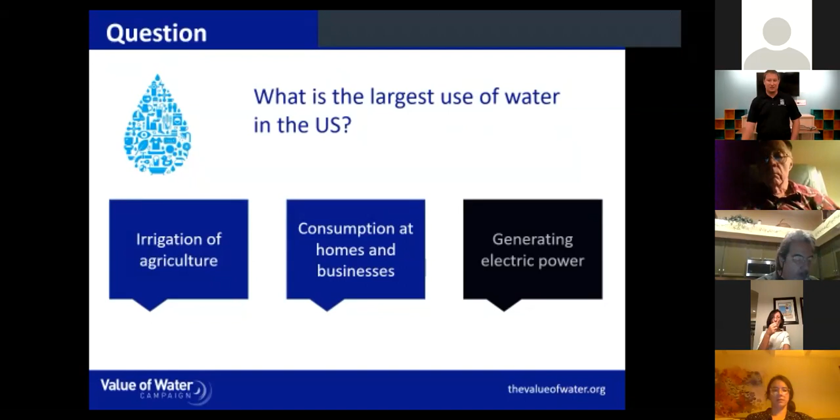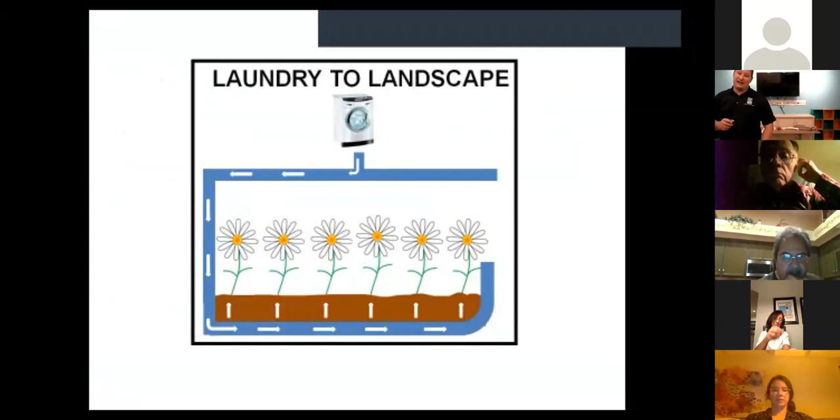All right, so now we're going to actually move on to the workshop and learning about what a laundry to landscape is. So first slide is, how do we use water? Well, for indoor use, 35% is in the shower and bath, 30% toilet flushing, 20% laundry, 10% kitchen and drinking, and 5% cleaning.

So your largest indoor use is going to be your shower and your bath, which is an important topic if you are going to install a more high-tech greywater system for your bathroom. I will cover that a little bit farther on in the presentation, but showers and baths are very high water users. Toilet flushing is really close.

It used to be the #1 until some of the plumbing codes changed, and then the water consumption started dropping in homes. Before '92, it used to be a 3.5 gallon toilet. After '92, plumbing codes changed, and it went down to 1.6.

Nowadays, 1.28 is considered high efficiency, and you can actually get toilets like I have at my own house, like a Niagara Stealth Assist, which is a 0.8 gallon per flush toilet. So it's not even a full gallon of water. Great toilets, I haven't had any problem with them. So those are your two biggest water consumers in your house.

But today we're actually looking at the laundry to landscape, which is still a very big user in your home, at 20%. So that's why we're focusing on the laundry to landscape. It's your easiest way to make a greywater system without requiring permits or getting a really expensive greywater system in your home.

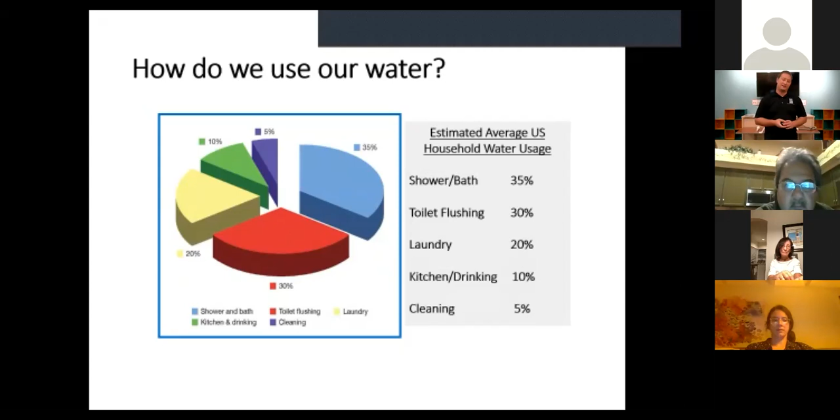Unfortunately, doing bathtubs, showers and bathroom sinks usually costs between $10,000 and $20,000 for the system to be put in, with permits required and all that type of stuff. So it is something good to consider since it is 35% of your household use.

However, with those things in mind, doing a laundry to landscape, where you don't require permits, is much, much cheaper, and you can do it yourself. It's a much easier and cost effective way to do it. And you also get a 20% drop in your indoor water consumption. So that's one excellent way to go.

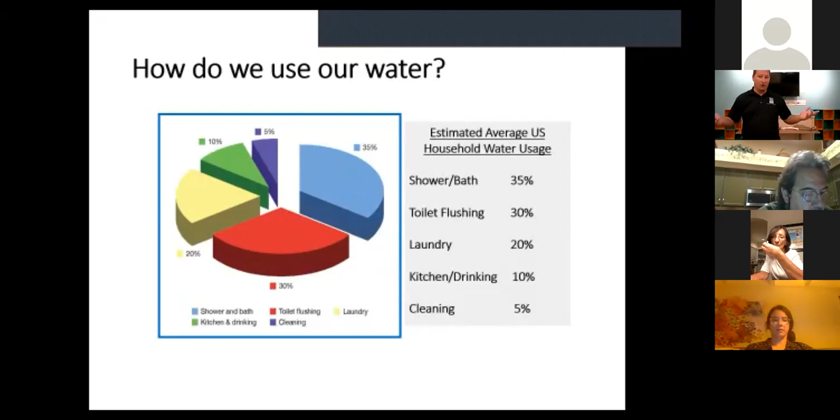All right, next slide. So why greywater? Well, our municipal water has a carbon footprint. So what's a carbon footprint? Well, it's the consumption of electricity, things of that nature. 19% of electricity used in California is related to water.

Reusing water that you've already paid for reduces the embodied energy per use. So you're getting 2 uses out of the water that you've already paid for, which reduces the carbon footprint and helps you with your bill and also with conserving water. So those are a couple main reasons why greywater is a good way to go.

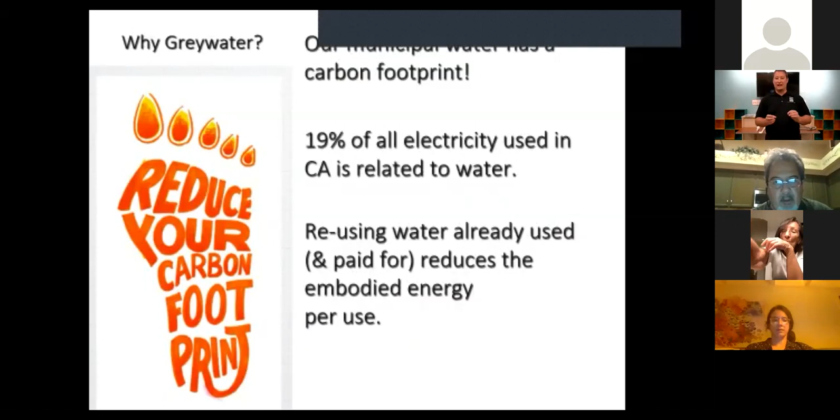All right, what is greywater? A lot of people don't quite understand what greywater is. Sometimes they think it's black water, which is sewage. Technically, you can get into that realm when you start dealing with dishwater and kitchen sink water. It's not considered greywater because you have all sorts of food particles and germs in that water. So sink water from your kitchen is not considered greywater.

However, shower and bathtub water is greywater, washing machine water, which is what we're talking about tonight, and also bathroom sinks. Those are the areas where greywater is made in your home: showers, baths, washing machines, bathroom sinks. Everything else is going to be considered black water or septic water. All right.

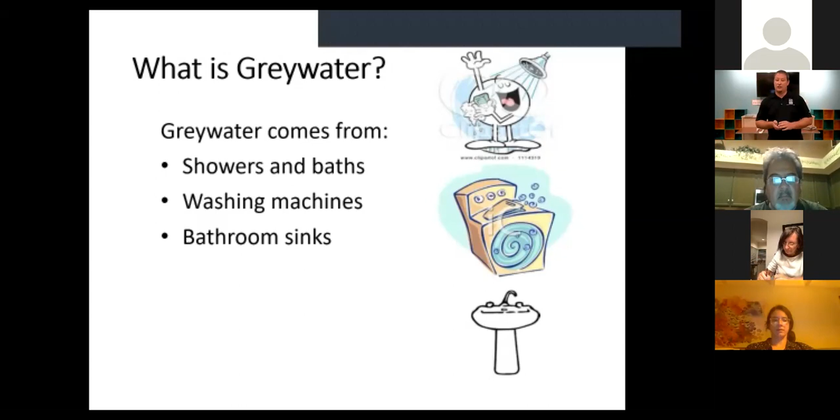What greywater is not, well, I already went over that a little bit. Toilets, which are septic, are not considered greywater. Kitchen sinks, also not considered greywater. Dishwashers, also not considered greywater. Washing certain items in your washing machine can make it not greywater. However, that has to do with the clothing that you are washing.

So when you are doing dirty diapers or oily clothes or clothes with chemicals on them, there is a three-way valve on your greywater system, which allows you to divert that water into your sewer instead of out to your yard to contaminate it. So if you did have some dirty washing loads, you just divert it instead of sending it out to your yard.

So technically you can consider that not gray water, but as long as you're using laundry that doesn't contain those items, it is gray water. So,

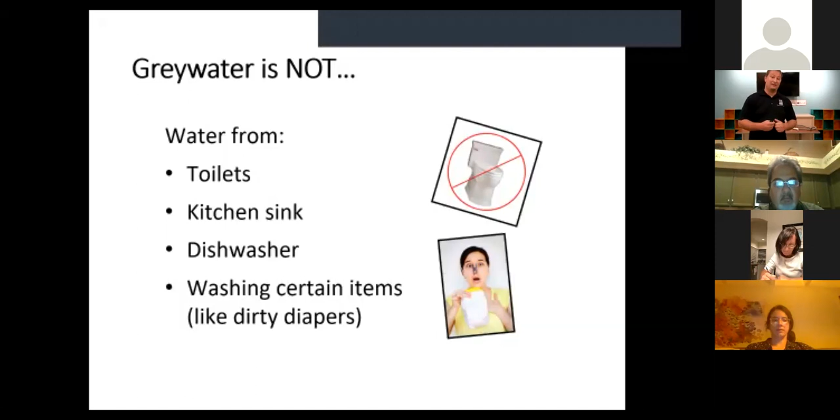all right, caution: gray water can contain pathogens. Definitely don't want to get pathogens, washing clothes with blood, etc. So those types of things you might want to divert out to the sewer instead of sending those types of pathogens out to your yard. Gray water may have chemicals in it, so like I said, oil-soaked clothing, etc. You would want to divert that type of material out to the sewer.

And then when you actually do get it out to your yard, you don't want it to pond. So gray water can actually turn septic relatively fast, within 24 hours, which is why you can't store gray water unless you build one of the really high-tech, expensive gray water systems like I was talking about, the $10,000 to $20,000 systems.

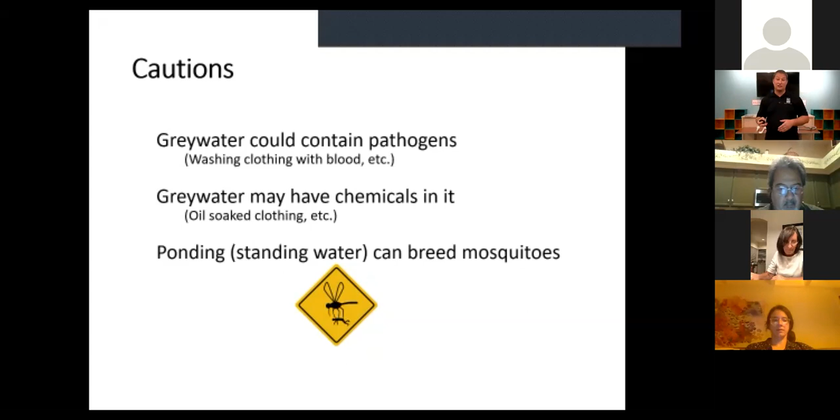I have a little mock display of one so you can kind of get an idea of what would go into that. But that's just to show you how much actually goes with a household gray water system compared to your laundry landscape, which is really not a whole lot of material needed to get going. So the storing it, all that type of stuff, you don't need to do and don't want to do unless you have a filtration system, because it does go septic.

Okay, so some of the benefits of using gray water: saving potable water. Can't really go wrong with saving potable water. Potable water is any water basically coming out of your house. Any drinking water is considered potable water. Any water coming out of your hose, any water you're using for showering or bathing or washing food, all of that is considered potable water.

So when you use gray water, you're reducing your water usage in a different area, but you're still doubling up on using that water instead of using potable water to irrigate outside for your garden and those types of things. You would save a little bit of potable water. You're technically using it twice. Well, laundry, it's not really using it twice, but you're washing your clothes and then you're sending it out to your yard.

So it's two uses. It also reduces the demand on your septic system and on waste treatment plants. So that's an excellent thing. The less water going down the toilet or down the sewer drain and the more water going out to your yard helps everybody, helps your septic system, also helps our treatment plant not have to treat excess amounts of water.

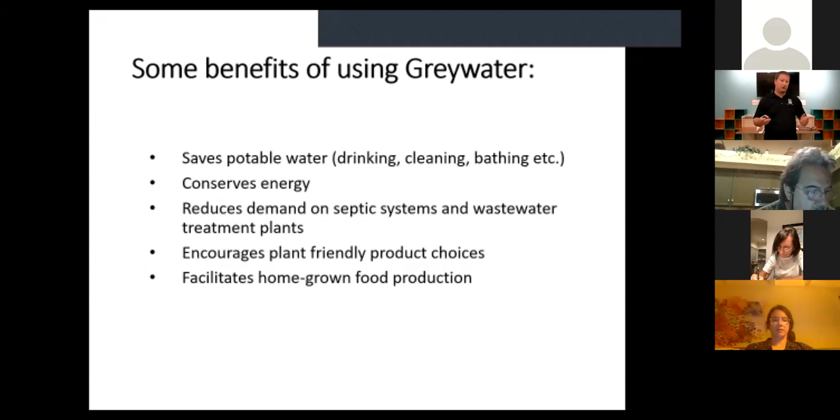It also encourages plant-friendly product choices. We'll go over the types of plants that you can plant and use gray water for. You don't want to just go all out and use gray water for anything. Like I said, we'll go over that. And then the last one is growing food on your own property. We'll talk about that a little bit.

Okay, so what is your gray water production? You do need to think about this when you are building your system. Newer wash machines use between 15 and 20 gallons per load. It's much less than the older wash machines that use between 40 and 60 gallons of water. So if you do have a newer one, you need to consider how much you're going to be able to use to go out to your yard.

The formula would be number of loads of laundry times gallons per load, and that's going to equal your production. So if your wash machine's running 15 gallons per load and you do six loads of laundry a day, or whatever the number is, you multiply those two together, which is going to give you your gray water production.

Typically, you want to use about 1 gallon of water per square foot of area. So you do need to plan accordingly when you're building your gray water system. You don't want to build too big a gray water system and not produce enough water to actually flow out to all those areas, because then you're just wasting money and you're wasting your time.

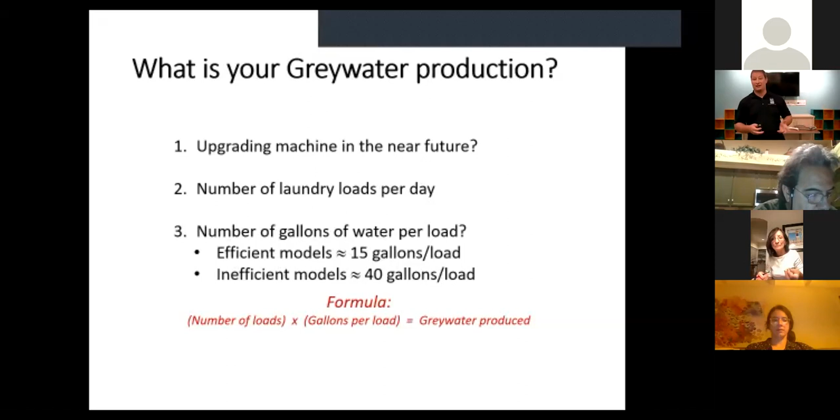So reusing gray water for your home can reduce between 16 and 40% of your actual total water consumption. So you can definitely get a humongous savings, but the cost is pretty large to get a gray water system. Water is relatively cheap. I know that's kind of crazy to say, but when you actually start doing the math per gallon of water, it's very cheap.

I know we live in California, and a lot of people don't think water is all that cheap, but in the grand scheme of things, when you're talking about $15,000 or $20,000 versus how much water you actually use, your return on investment would be pretty far off. But if you care about the environment and conserving water and you want to build a whole gray water system for your house, by all means, it does require a few more hoops to jump through.

You do need to get permitting. You'd have to go to the building department and get a plumbing permit. You'd also have to hire a company to install the system, most likely a certified gray water company that has all the licensing, so that you don't have any cross connection or contaminants. That's really what the permits and the concern is with home gray water systems: people somehow tapping into the potable water line and contaminating everything.

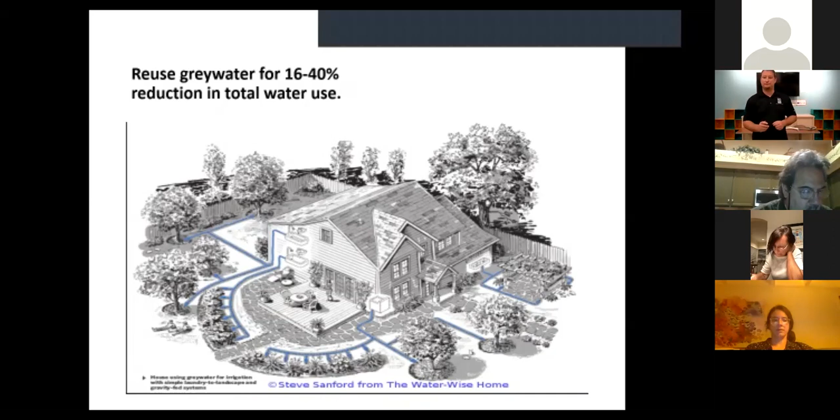This right here is a very, very small, really dumbed down mock display of what an indoor system would look like. So you can see to my left, it looks like a sink that is a display of a kitchen sink. And below that is basically a holding tank and filtration area. You would drain down into that tank, then you would run it through a filter and then pump it basically back into that storage tank.

So you do need filters and treatment type devices so that the water doesn't go septic on you. Once you treat it and it goes through that filter, you can store it because you've taken out all the particles and the pathogens, so that it doesn't get really stinky on you. That's really the concern with the water going septic so fast: the smell and also the breeding of bacteria that you don't want.

A sump basin to collect the gray water at your house, a pump to push the water through a filter, which removes the particles, a filter that automatically flushes. It's a backflow device, really, so that water can't go backwards into the system. Why they want a backflow on it when it's not connected to a potable water supply, I'm not sure. I guess they don't want it going back into your tank after it's made its way out. But in any case, a backflow device would be there.

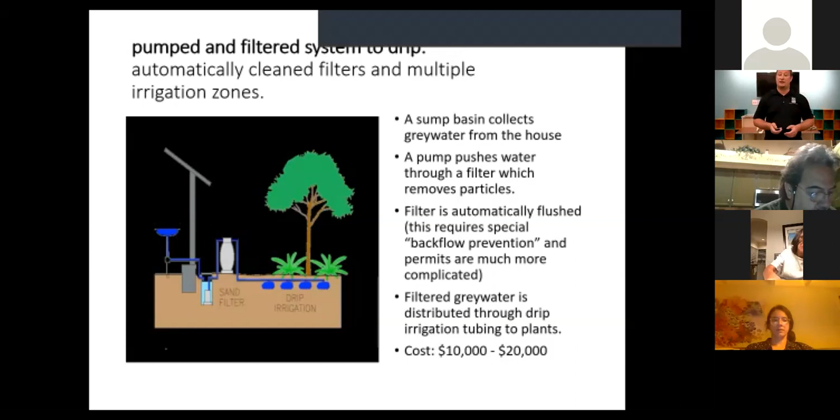But in any case, we're not going to be really going over that because we're doing laundry to landscape. I just wanted to let you guys know that there are other avenues if you wanted to do an entire house, but the cost is there. So, okay, laundry to landscape, which is what we're here for tonight.

I know I kind of talked about a bunch of other stuff and got you guys familiar with what it is, but now we're actually going to be talking about what the system is, how to build it, and get you going from there. So this right here is an overview of what the greywater system looks like. Very, very dumbed down. It doesn't require all the filters and pumps and all that type of stuff to get you going. Really, your wash machine is your pump.

The cost of the material is a couple hundred dollars if you do it yourself. I've heard about $700 if you hire somebody to do it. That seems kind of steep to me. Personally, I would do it myself if I was going to do it.

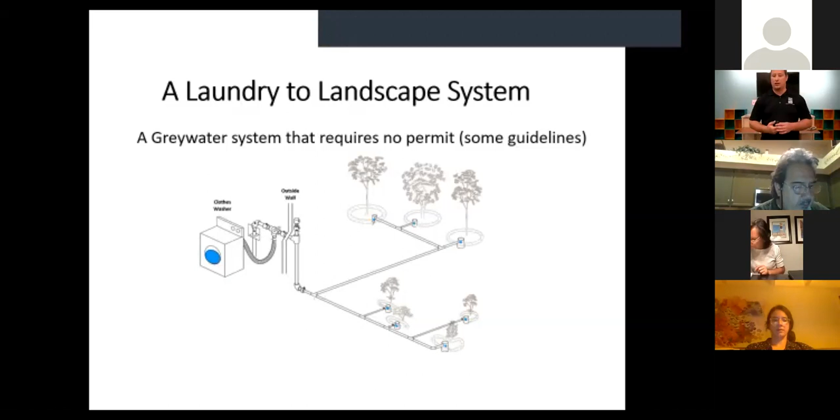This shows you the tube coming off the wash machine, going up into that three-way valve, and then it branches off, goes down into the sewer, and goes out to the irrigation with an anti-siphon on top. I do have anti-siphon stuff. I have the three-way valve. I'll show you guys all that. And once we get a little farther into the outdoor stuff, past the indoor stuff, on the diagram you can see the PVC going out to the different trees and then the basins around the trees. We'll go over that.

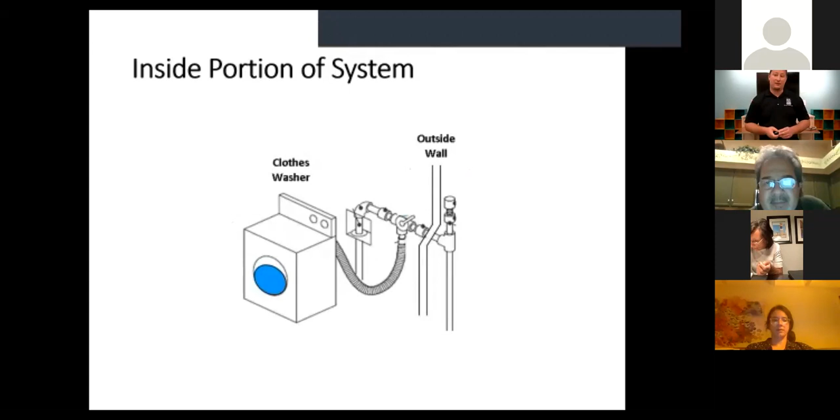All right, so this is a closer view of the indoor portion of the system. Really, really dumbed down, like I said before. It's not very high tech. Pretty much anybody can do this project if you take some things into consideration. So that right there is really the indoor display of what the greywater system looks like. All right, so this is your three-way valve.

So I guess I'll start showing you guys some of the parts, and then we can keep moving through it from there. So I'm going to go ahead and share my screen. Or I guess I'm going to stop sharing. Hey, Ashley, I stopped sharing, right? Yes, that's correct. Perfect. All right, so

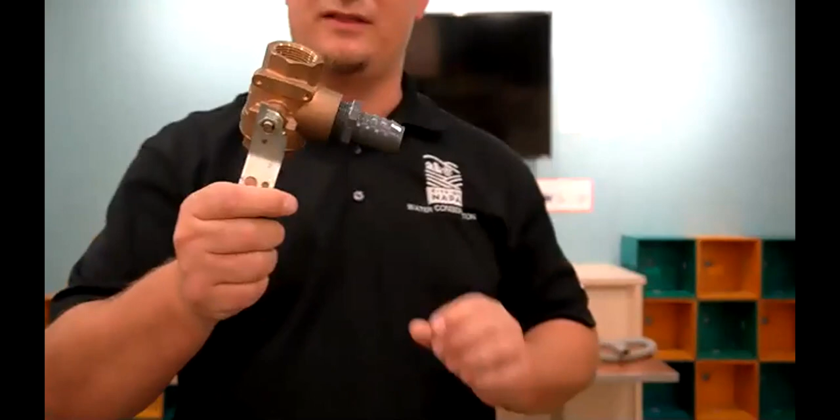The heart of this entire project would be this right here. This is your three-way valve. When you're buying a three-way valve, it's very important. You can get three-way valves where, when you close them, they don't give you a full flow. It tapers down, kind of like a round ball. So you need to get one that flows all the way through, without any tapering. These valves are about $50, $60. This is probably the most expensive piece of the entire system.

You can set it up to the side, or you could set it up this way, just as long as your tube coming off your wash machine goes into the middle portion of this. So this is basically the tube coming off your wash machine, a clean version. We'll say the wash machine's off to the side so you don't see it. So it's out here. This piece would come up and connect into this, like so. Just like that. So this is the first step in getting your greywater system hooked up. You've got to get yourself the source of water, which is how this works.

So the other side's connected to your wash machine, and your wash machine has a pump on it already. So it pumps that water out, and typically this hose would go down into your septic, into a drain pipe or a sink, those types of things. I've seen sinks, I've seen normal drain lines. Really it just goes out to the sewer. So if this wasn't here, this piece would just go straight down into the sewer. The wash machine pumps the water right down into it.

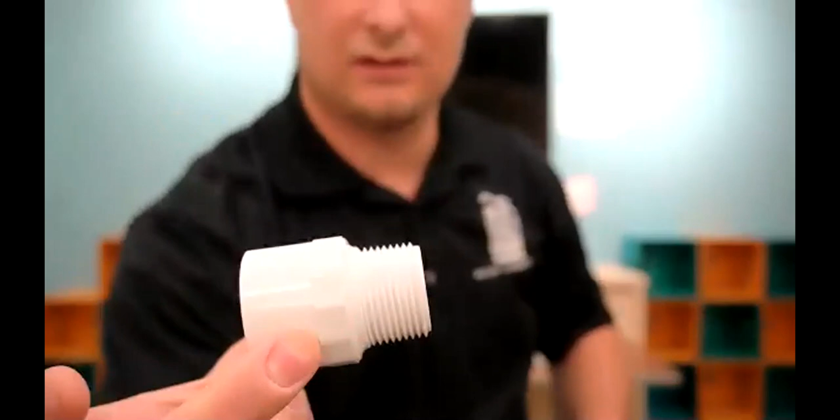Instead, we're hooking it in, and then we're taking these two types of connectors right here. You have threads on one side, open on the other, so you do have to glue PVC to this side. I would recommend using Teflon tape around the threads. So you Teflon tape it, and you screw them in.

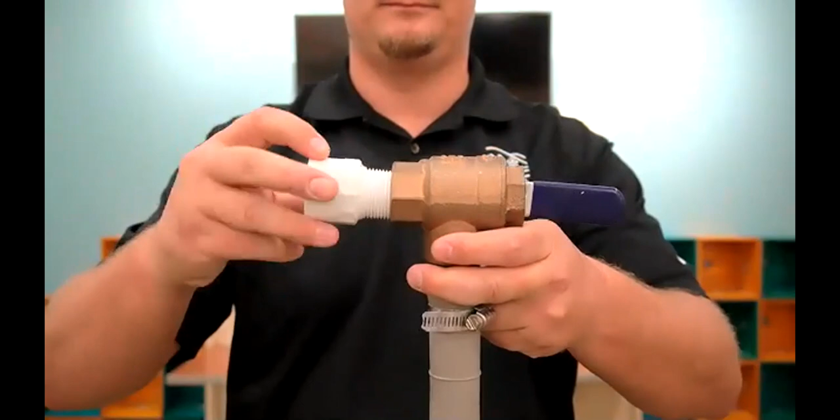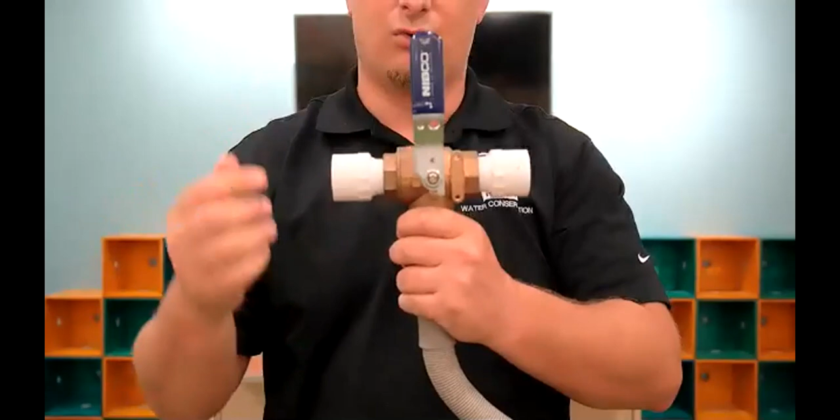On both sides. So you have your beginning pieces to actually get you to start being able to build your greywater system. So that's the beginning right there. You can see your shut off. Yeah, this is actually your diverter valve. So when you open it up, it's going to go out to your irrigation system, or when you close it, it's going to go out to the sewer system. So that is your first step.

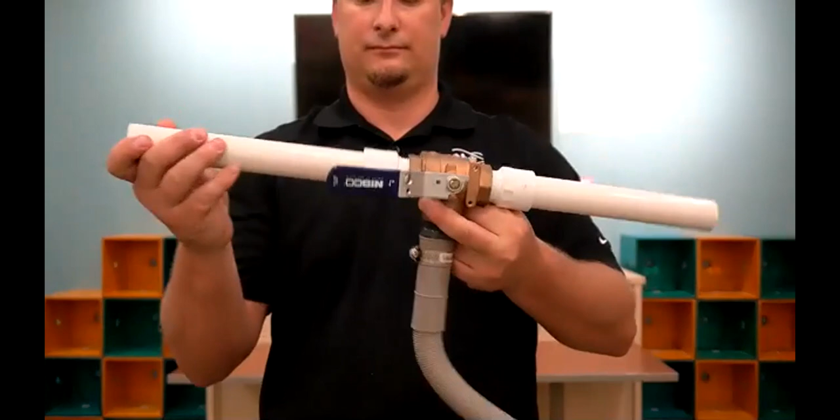Get yourself a couple pieces of PVC pipe, hook on each side. And then you also want to get some pipe straps as well, so you can strap it to the wall so that when the pump's hitting this thing, it doesn't jar it. You want it to be nice and tight against the wall. Put your two straps on like so. All right, so now you're starting to get this thing built.

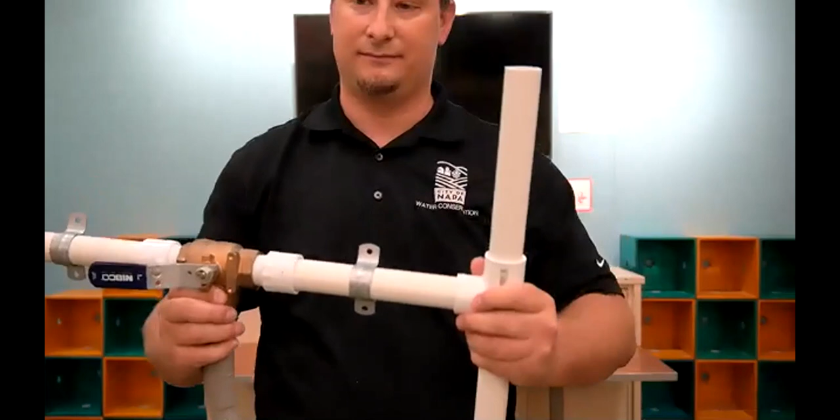Then you get yourself a T, hook that guy in. This side would be going out to your irrigation system. This side would be going down into your septic system. I just went ahead and built a little downward piece. So this piece right here would go into your sewer system, or just drain into a sink, however you have your outlet portion for your wash machine. So that's how you would set up this section. You strap it to the wall, get your pieces in, hook it up, set it down into your sewer system.

That way, if you do have those types of clothes with pathogens or oil or chemicals, you hit that valve, close it so it doesn't go out to your irrigation system. It goes that direction to your sewer system. That way you don't kill any of your plants. And then if you want to run it out to your irrigation system, close that one off, open the other, and go in that direction.

And I'm going to set this down for one second, because one of the most important things of this is your anti-siphon. So I pulled it apart so you can see that it is three pieces. This piece right here goes into this guy. They typically sell these in a pack, so that there isn't a whole lot of confusion. This is called an anti-siphon valve. Take this guy right here, you slide it into this one. That way you can glue in here, and you can glue this down onto your PVC pipe. This is your anti-siphon piece right here. You would take that and screw that into this portion.

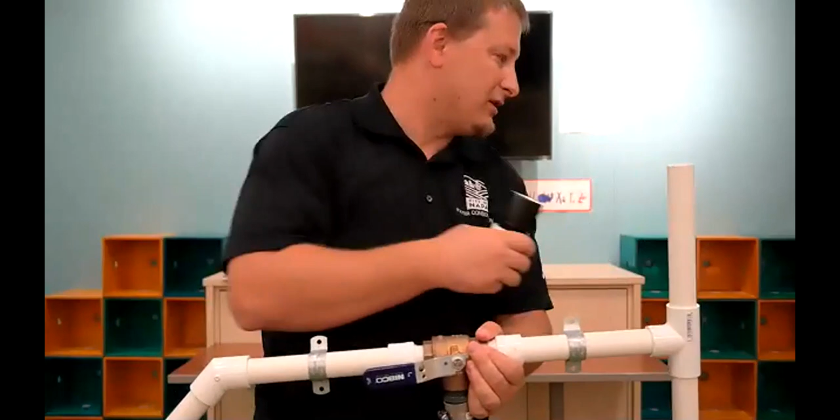You're fine. You can go ahead. You can drop it. It's all good. No worries. Thank you, though.

So you would take this and hook that onto the top. Now keep in mind, this portion is the portion that goes out to your irrigation system. This has to be the highest point of your system. You can actually do these if you live in a 2-story house. You just would need one of these to be pretty tall. I haven't seen it in person, but I have seen in books and slides where people have used their anti-siphon for an upstairs. It's on the outside of their home, but it's like an entire floor.

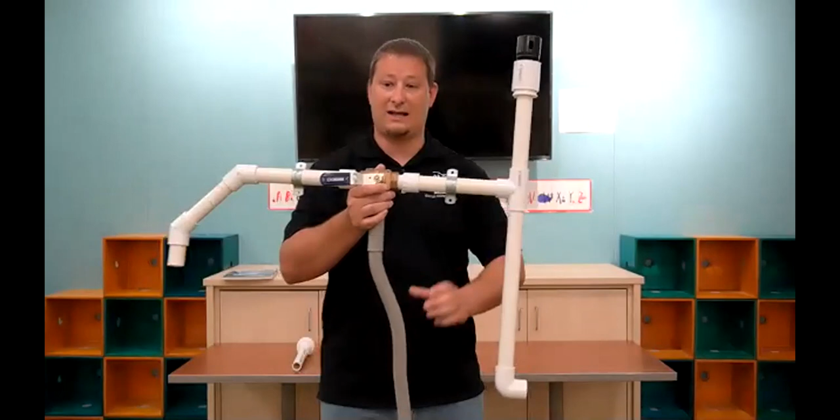It's 10 feet or more of PVC with this on the top. Like I said, this has to be above your wash machine so that it can help break that suction. So this right here, scoot back so everybody can see it. This is your fully built indoor portion of your greywater system.

The $10,000 to $20,000 system, when you look at this, is between $55 and $60 right here. A piece of PVC is between $5 and $10 for all of this stuff. Your anti-siphon is probably $5 at the most, and then all your connection pieces are 60 cents to $1 depending on what type of piece. So the price to build this is not really all that much. Under $100 you can build this entire indoor section of your greywater system.

Now you're going to have to buy some outdoor pieces as well, so your cost is going to go up a little bit. However, your indoor set should run you under $100. And this one you wouldn't even have to buy. This one would be coming off your wash machine anyways, because like I said before, this piece would be going down into a sewer drain line already. So all you have to do is look in the back of your wash machine, see where this pipe's going, pull that out of the drain line or the sewer, wherever it's dumping into, and hook it into this. So you already have this piece. Everything else is relatively cheap to purchase. So that is your full indoor section of your greywater system.

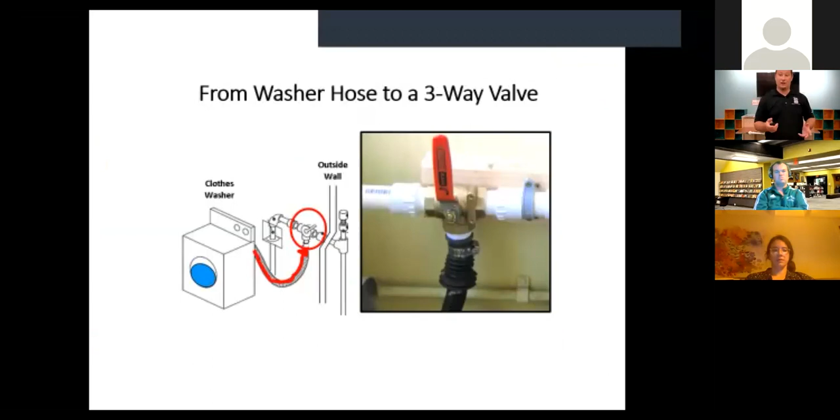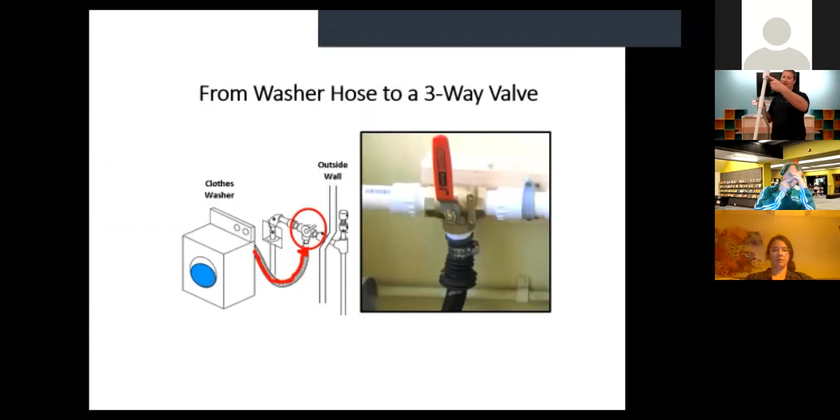Okay, so like I was telling you, you can see in red coming off your wash machine, that is your drain line coming off your wash machine. It goes up into the middle portion of your three-way valve, like I showed you already. That's what this is doing right here. And then one direction goes out to your sewer, one direction goes out to your irrigation. Remember, this side always has to go to the irrigation side. Okay.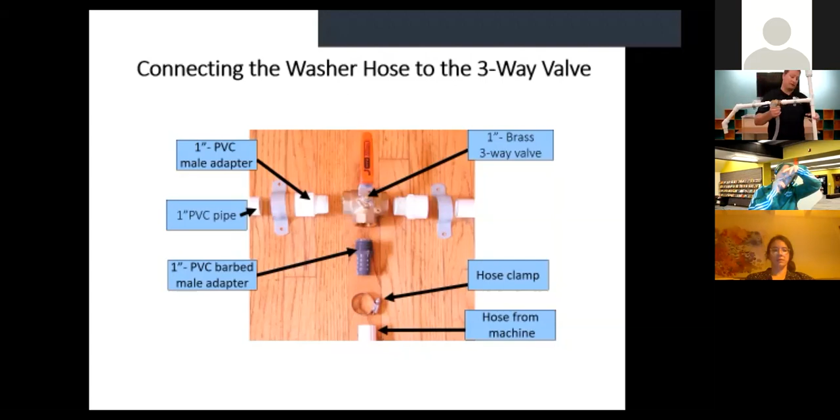All right, so this display is just the connection pieces that you would need. It's going to be this piece here, this piece, your pipe straps, your barbed tee for the bottom portion of your three-way valve to connect onto your wash machine drain line, and then also a pipe clamp, I guess is what that would be. So that's just a display of the parts that you would actually need, but we've already gone over that. Okay, sometimes your hose. This is actually good info.

Sometimes your wash machine hose doesn't always look like this. It can look like the one in the picture. Well, the one in the picture, you still have to get over these barbs. So one insight that you can use to try to get these over the barbs is heat up that plastic, make it a little bit soft, just in some hot water, and then you can kind of work it over those barbs. It's actually good if it's a tight fit. It has less chances of popping off, but you still want to get your pipe clamp on there just to hold it on to be on the safe side.

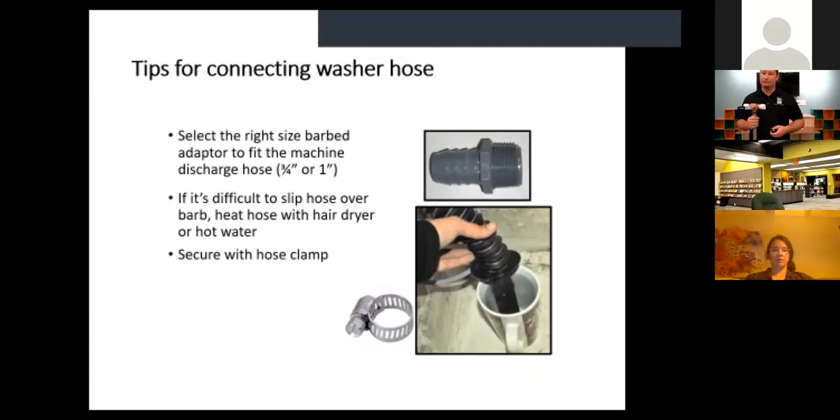Okay, so just some more tips. Make sure that you use a barbed tee or a barbed nipple for your bottom part so that it really gets a nice good connection. The vinyl tubing, that's what this is. Like I said, you can go with the other type that's not a vinyl. This one I believe is vinyl, but honestly, just go with whatever is on your wash machine. There's no need to go out and buy another one of these when you already have one that's working on your wash machine already. And then make sure that you use pipe clamps on both ends as well.

You don't want any chances of this guy working its way out. And if you don't put those clamps on your PVC, this thing can work its way a little bit and kind of rattle, because it is a pump that's pumping water into this, and this thing will be doing this and it can move this. So you want to make sure that this is nice and secure and that these are nice and clamped on there. Okay.

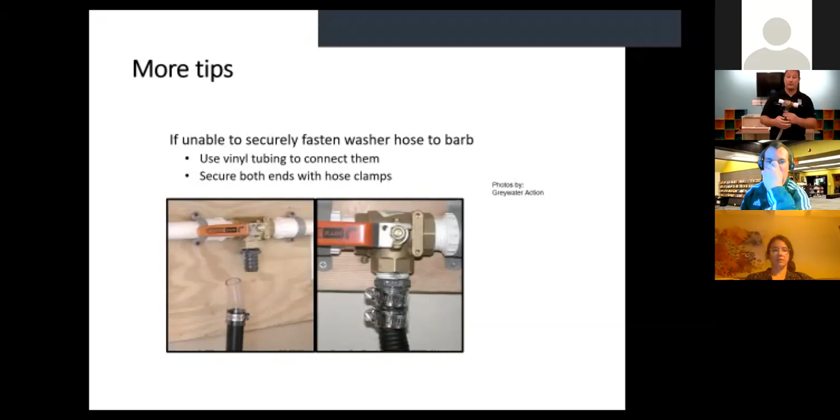All right. So when I was showing you guys the full display, this is a picture of two different ways to basically drain the water. So like I was saying, I've seen people use sinks to drain their water into the sink, because really that water is going to the sewer anyways. Or on the left, my left, that is actually going into a sewer outlet designed for your wash machine. Quite a bit of homes have it that way. My home's from the 50s, and I have a metal pipe that just runs up that the tube goes into. It's basically the same thing as the one on the left.

The one on the left just has this portion right here that comes off of that guy. It's just going straight down into the drain. There's no running it past to dump into a utility sink. That's basically what that is, a utility sink in somebody's garage or in their laundry room. But you could do it either way. It's really just a matter of how you dump your laundry water that you don't want to use.

Especially during winter months, you really don't want to be using this. You already have so much saturation out there anyways, that you do want to just turn that valve to the direction so that it would go out into your sewer instead of going out to your irrigation system. So that's what that would look like. This might need to be a little bit longer to reach into that drain line or that drain outlet, or it could not. That might work too.

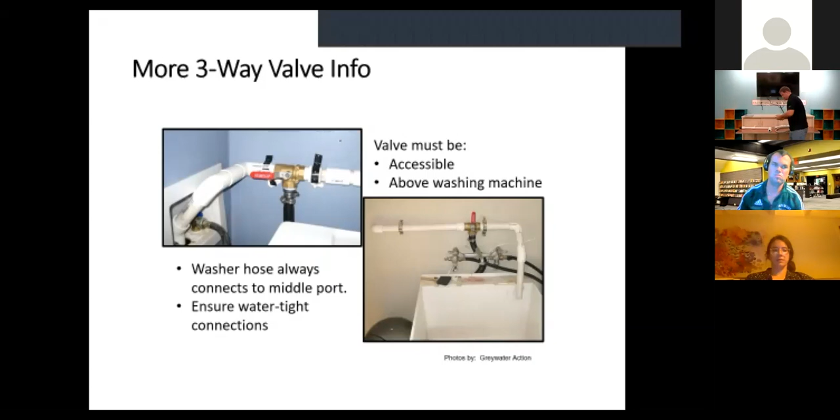Okay, just some more pictures on the correct way to do things. The one on the right with the flexible tubing, you can do that if you like. Well, it is strapped to the wall, but that vinyl tubing might have a little bit of flex to it, and it might wobble a little bit as the water is going through. They used that as just an easier way because it's flexible.

Instead of doing a T around or an elbow around the wall and kind of doing more cuts and bringing it down into that drain outlet, they just use that flexible tubing, basically washer machine tubing, instead of going PVC all the way, which is fine. You're more than welcome to do that.

And then the one on the left, that is a display of something that is very tight. I would not recommend doing that. That to me looks like they most likely have stackable washers in a tight location. So they did what they had to do to get a greywater system in. That looks really tight to me.

You don't want something that is so tight that you can't access it, because you are going to need to turn that valve. Depending on, like I said, if it's the winter time, if you're using oily clothes, if you have children and you're washing diapers, you are going to need to be able to access that valve. So I really would recommend not putting that valve in an area where it's going to be hard for you to reach or behind something.

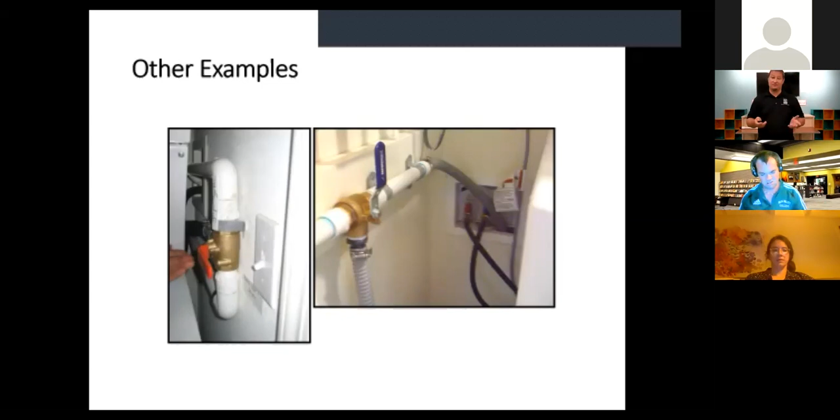It's an example. I know it says other examples. Personally, that's an example I wouldn't recommend doing, but really at the end of the day, what works for you in a tight location is, it's the real world and you have to be realistic about things.

So straps to hold things on. I've stressed it a couple times. It is important to make sure that it is strapped to the wall so that you don't get that vibration from the pump pumping the water through it.

One thing that most of these pictures haven't shown, which I would actually recommend using. You don't have to as long as you're labeling these pipes, and you'll see that later on in the slides. That is one of the requirements, that you label with a sticker or something saying that it's non-potable drinking water, so that you know not to drink the water. But you can use purple pipe.

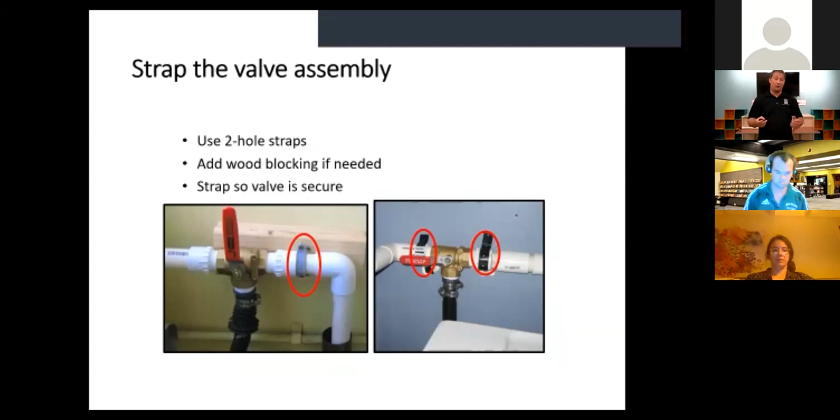Most of the time purple pipe is for recycled water, but you can also use it for gray water. It indicates to people that this is non-potable water. Especially if you're in the water industry, if you see purple pipe, you're going to know that is not potable water, and that is either recycled water or gray water. So I highly recommend using purple pipe when you're building your indoor and especially going outside. These are not really the best examples because these have all white PVC, but if you want to use white PVC, it's perfectly fine. Just make sure you're labeling it correctly.

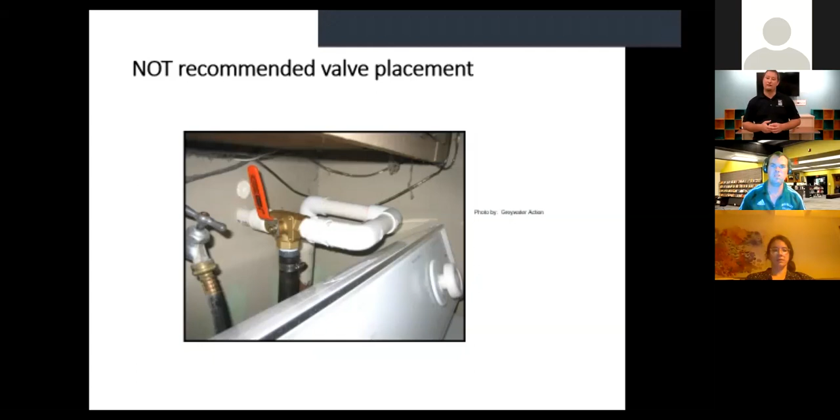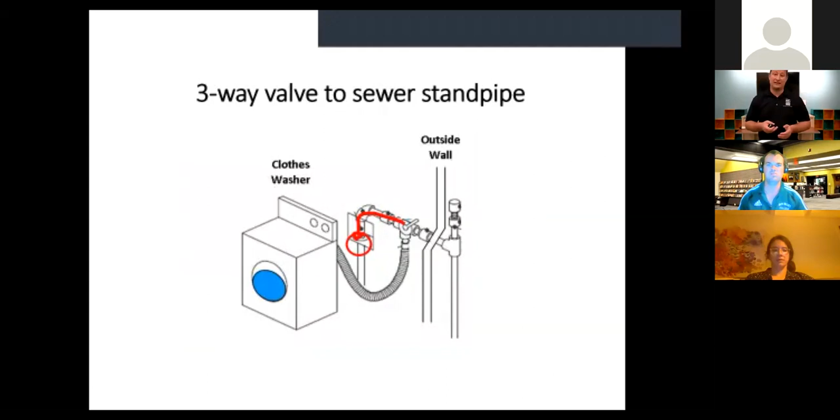Okay, so three-way valve. One goes to your sewer, like I've already explained to you. That's what that red line is showing you. One goes to the sewer, one goes out to the irrigation system. The irrigation side has the anti-siphon valve. That's how you know it's going to the irrigation. The other side, the one with the red line, does not have your anti-siphon. You know that portion is going to your sewer.

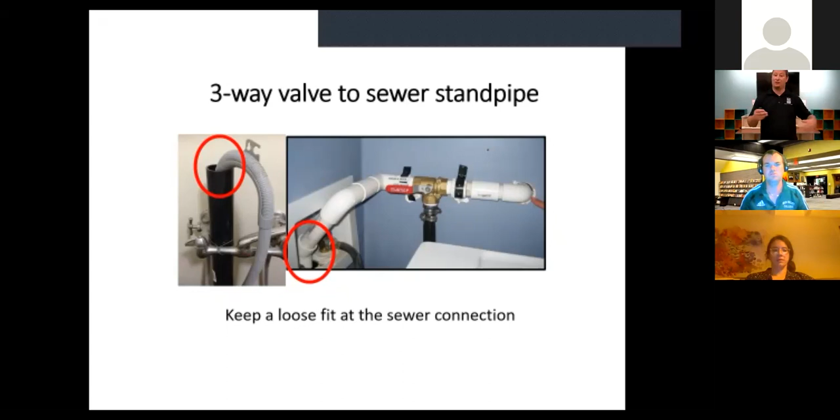You do want to make sure that the fitting going into your sewer outlet is loose. You don't want to strap that thing down. You want to have a little bit of wiggle room, because as that water is going through it, it's going to vibrate a little bit. Just not recommended to strap those down. You want them to be able to wiggle a little bit so you lose your vibration at that end rather than somewhere else in the system where it can work on a joint.

Okay, your anti-siphon portion, I've kind of stressed this already. Anti-siphon portion is on the side that goes out to your irrigation system. Your three-way valve, water goes in, goes out to your irrigation system. Anti-siphon's there to keep that vacuum from happening.

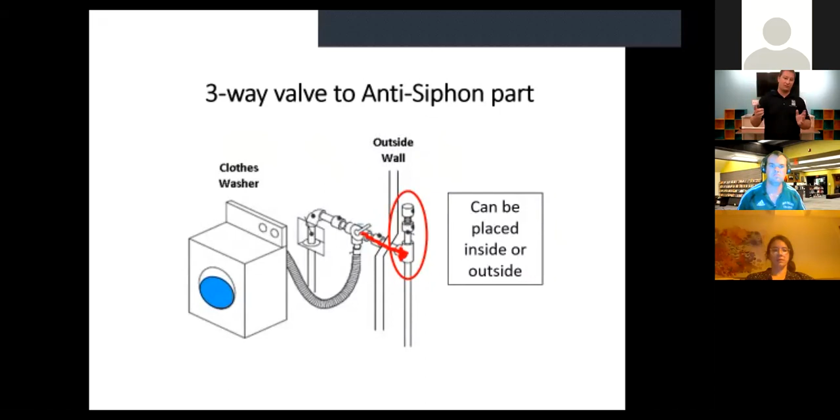Okay, anti-siphon, which is this part that I've already kind of let you guys know about. Very, very important to have this. System will not work if you do not have this piece. You really, really have to have it. It's a critical piece. So like I said, it prevents a siphon from happening and a vacuum happening.

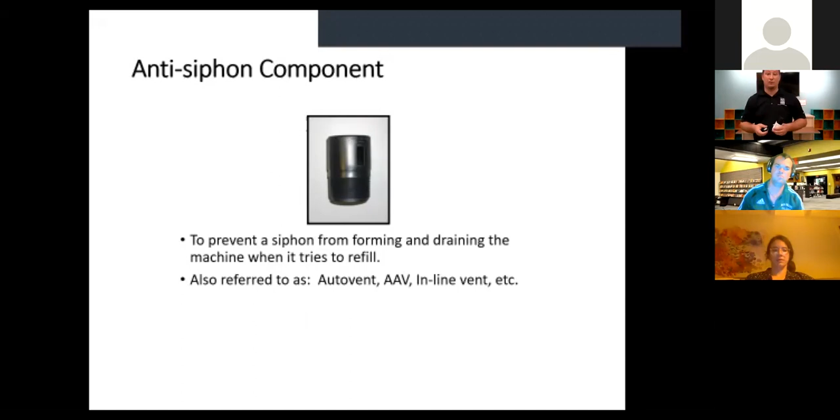All those are all the pieces that I've already showed you guys. Those are all the parts that you would be required to build your anti-siphon and also build the portion that goes out to your yard. So I've already shown you guys that section of it.

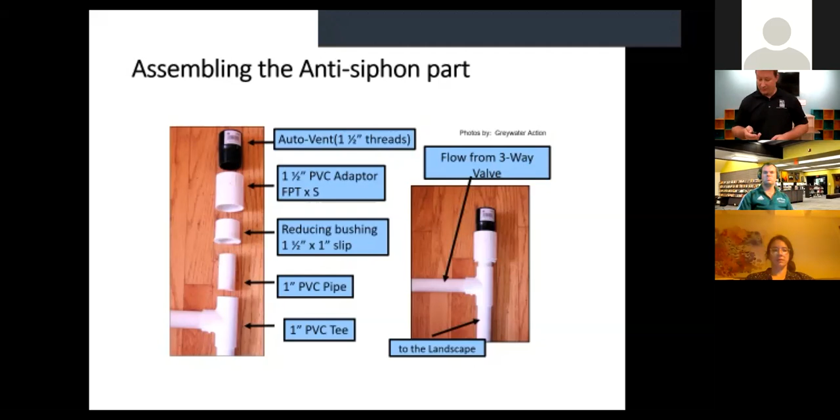Okay, more anti-siphon requirements. Must be visible and accessible in case of leaks. Must be the highest point, like I said before, must be the highest point in your system. Otherwise, you can get water actually coming out of it if it's lower. So you don't want that to happen. Must be placed on the landscaping side, also crucial. I've stressed that several times. Must be on the landscaping side.

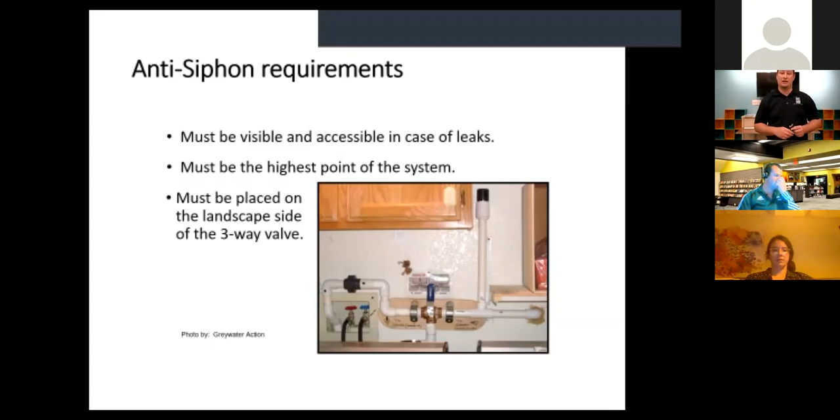And then also more requirements, making sure that it is labeled. I've kind of already gone over that type of information with you, but it does need to be labeled so that you do know that it is non-potable water. Including operational manual. You do need to create an operational manual for your greywater system and leave it with the actual system. It is one of the requirements to make it basically up to code so that you don't run into any troubles. You can take your own pictures and make notes. It doesn't have to be anything high tech.

It is just a manual explaining how it works in case you sell your home and somebody moves in to your property and has this greywater system that they've never used before. So it does need to be there with your system.

And then no pump or potable water connection. If you start getting into pumping and storing, you do need permit requirements and filtration and all that type of stuff. So you don't want it. So no pump using and no potable water connection using, other than what's coming out of your washing machine, because obviously that's non-potable water.

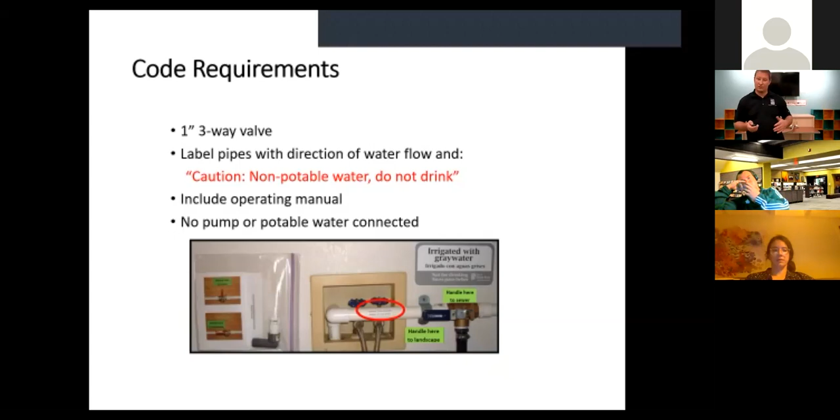Now we get into something that is actually also very important, and that is the types of cleaners that you use. Liquid, so basically plant-friendly types of laundry detergent. You want to stay away from salt, boron, and chlorine types of laundry detergents. Liquid laundry detergent, you can get quite a bit of plant-friendly different types of laundry detergent.

Hydrogen peroxide. It says on there that you can use hydrogen peroxide bleach, but I would probably steer away from that, to be completely honest. I would try to find a liquid detergent that is plant friendly, and kind of stay away from any types of hydrogen peroxide bleach types of chemicals.

You get ozone systems that don't even require laundry detergent. Lots of really big commercial hotels and those types of places that do a lot of laundry actually have ozone. And ozone's an excellent way to clean your clothes without using detergent.

I used to work for the city of Santa Rosa, and one of our techs, kind of more like one of my mentors, we used to call him the saint of the office because he had 12 special needs children that they all adopted. Well, because he had all these children, they were doing tons and tons of laundry, which then soap, hot water, all of those types of things.

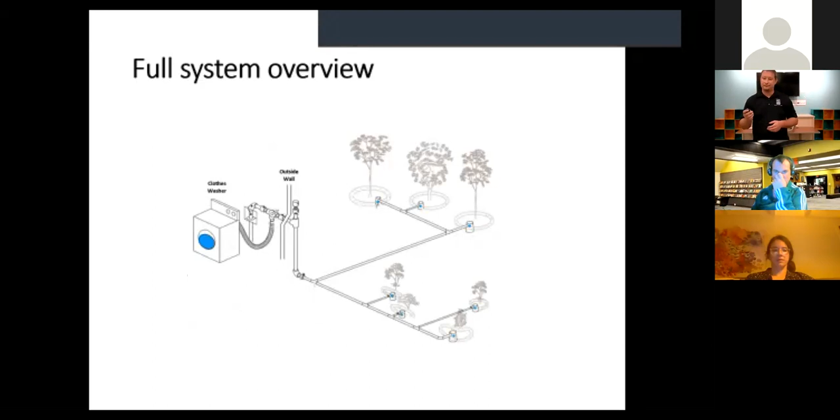All right, so hardscapes to consider. So like I was saying, you do need to have either a flat surface or somewhat of a slope. Now, a lot of times you have to go across concrete to get it out somewhere. Now, what is that going to entail? Well, it's going to entail cutting the sidewalk or moving the bricks. Either way, unless you just want to run it straight across your sidewalk, where you have an area where you can run it across, or you have a gap in between your pavers.

There are plenty of situations where it doesn't have to run across a hardscape, but you do need to keep that in consideration based on where your wash machine is and the plants that you do want to water with that wash machine water. So just something to keep into consideration, having to cut sidewalks or figure out a way around it, really. So just food for thought.

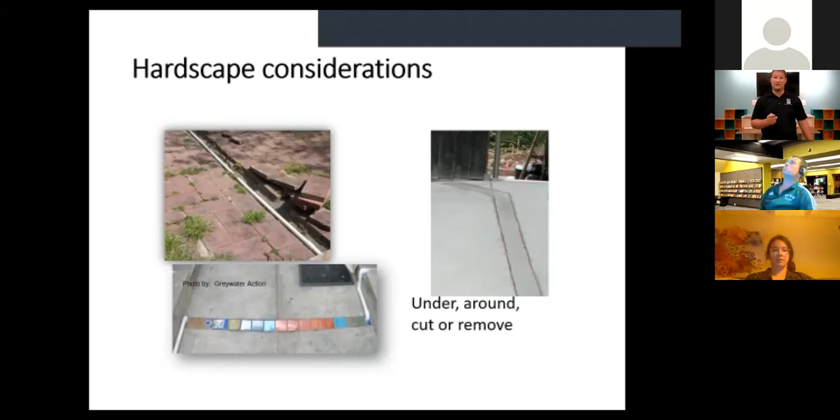All right, distribution points for your irrigation basins. So we're going to go over what these are. You can use different types of distribution boxes, really. What I found that works excellent are these guys right here. This is just an irrigation control box. I just bought one of these for my house. I think it was $4.95 at Horizon. So relatively cheap, literally $5.

What you would want to do is dig a trench around your tree, which you'll see some pictures and diagrams of how you do it, but this is just letting you see what it looks like at first. So you would want to drill a hole in the side of this thing so that you can run your tube through it. This top pops off so that you can work with it and adjust the flow, and I'll show you how you do that here in a second.

But you drill a hole in this side, drill a hole in that side, and you would run your tube through this with your barb T in the middle, so you can tilt it up and down to reduce or increase the amount of flow that's pouring into your basin. So you would want to dig a trench or a basin around a tree or whatever area you're going to be delivering the water in. You then would set this down so it was flush with the ground, and then you'd work your tube.

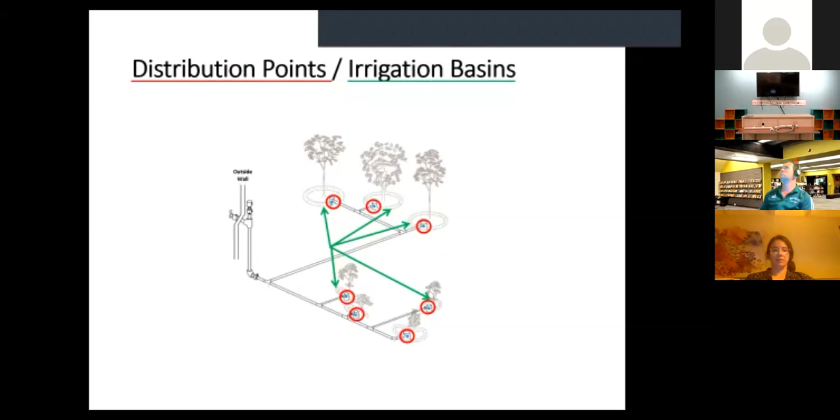All right, so this is a picture of one of the basins itself. So you dig a trench around, if it's a tree or whatever area you want this water to be delivered in, you would dig a trench around that area, and you would set that basin down in it. This one, you can kind of see on the one side, if you really look at it, that there's a T going into that little round irrigation box, and then the tube keeps going.

That's one way you can do it, or like I said, you can get a hole saw or a hole drill and drill through and just run it through. That's another option. And then you fill that entire basin area with mulch or with wood chips, so that you basically fill in that area. And as that water pours into that irrigation box, or that looks like a reused plant pot, which is fine to use.

A lot of people doing these types of projects really care about the environment, and they also want to recycle and reuse. Well, using pots, perfectly fine. A lot of times they just cut around the rim and leave just a small section of it attached so that the lid can flap up and down. That's another way to do it. You don't have to buy irrigation valve boxes. I just did because I've seen lots of projects done that way.

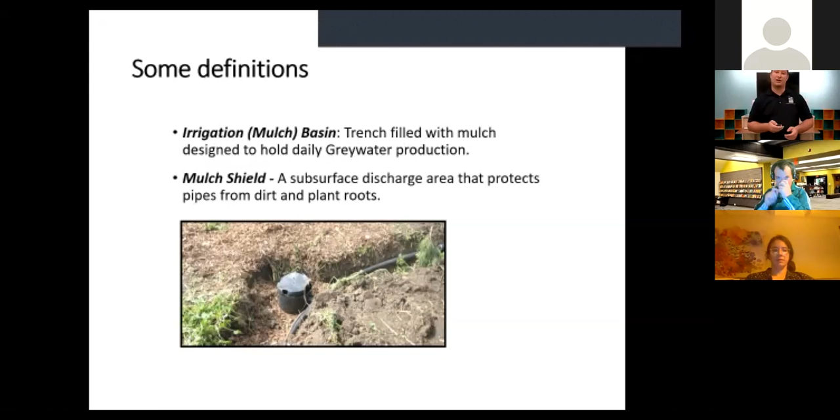So you can cut it with a PVC cutter, and you can make S's or do whatever you want. It's a little bit easier to use instead of making these straight lines or having to cut all these T's or elbows into your PVC. You can just work your way through it.

So this right here is one of your distribution points. It's the farthest distribution point on your system, because one of the most important things that you need to know is you cannot cap this system. So the very last irrigation box or pot that you use, your distribution point, the very far one has to be open.

You have to leave it open, so that if any of the other ones get clogged up, it has a place to dump that water instead of backing all the way up into your washing machine. So make sure that you leave the very end of your outdoor irrigation line open.

Okay, so that's a pretty good view of how the water just dumps into that distribution box and can filter out. It's just going to be pouring and pouring, and as it's soaking out, the chips are going to soak it up, and it will work its way around. And the plants' and trees' roots will over time grow to those areas as they get saturated. You want to think about your tree as the canopy. You dig this big basin or this big trench around your tree.

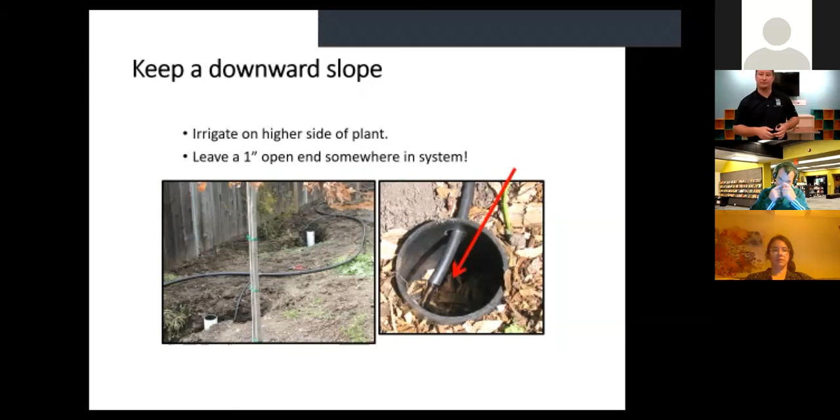These are just different models of what you can do, what type of boxes you can use. It doesn't have to be, like I said, an irrigation box. You can use recycled plant pots. The one on the left, you can see it looks like a little nub going into that. Well, it's obviously a recycled plant pot. You can see that they just cut a small hole in that guy, which is perfectly fine too. You don't have to drill 2 holes and run the pipe through it. It's one way to do it. You can do it just like that one.

The one on the left, they just drill the hole in it and push that T, which looks like this. They push that T right into the side. So they drill the hole into the side and they push that guy right in there. Well, if you don't drill the hole big enough, you can't move your T up and down. You want to be able to move your T up and down, which is why I recommend drilling holes and running it through your irrigation box,

because this is how you're going to adjust the flow into this. If you tilt it down, it's going to pour a lot more water out. If you tilt it up, it's going to dump less water out. So it's a way for you to leave it open without having a shut off on it, but monitor and regulate how much water is going into this box and into that irrigation basin.

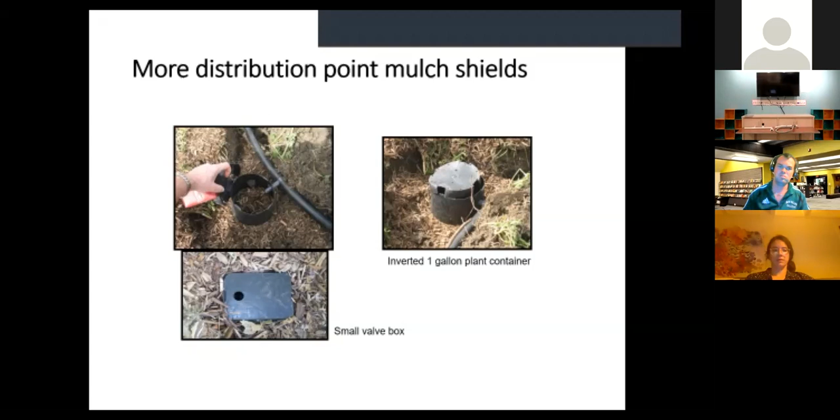All right, this is a display of what a mulch basin looks like. So like I said, you want to dig a trench around whatever you're doing, or a bigger diameter. Really want to dig a trench. You could just basically dig a basin, a circular basin, and fit that irrigation box in there and run your tube into it and have mulch all around it. This is a side view of one. That most likely is a trench. That would be a circle around whatever they're doing.

Just with a trench, you get a little bit more even delivery of water and application, the saturation of how much water is being delivered. You're not getting really saturated on this side, less saturated on this side. That's also based on how you would adjust those tees, because you want to have everything evenly saturated in the ground. But in any case, that's what that picture is. You can see that most of that is your mulch. So we got a big trough, big trench, irrigation box right in the middle of it, your pipe running into it, mulch all the way around.

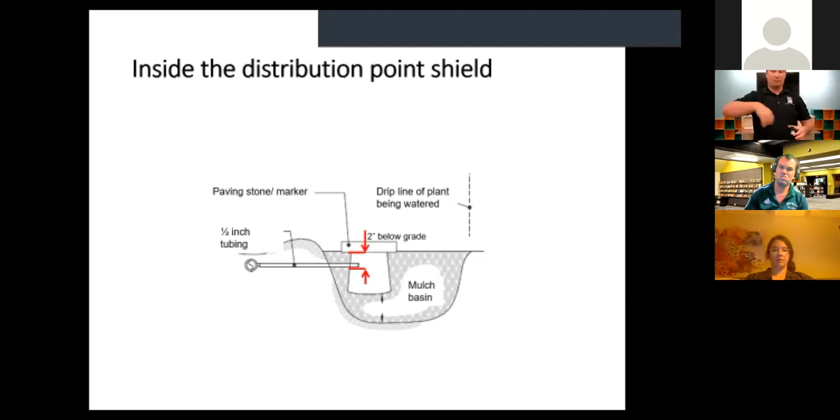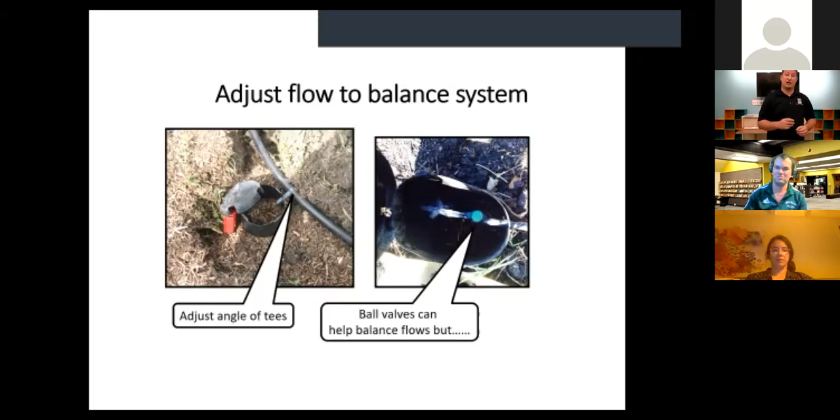So if you want to do a ball valve shut off type of situation on one farther up the line, hey, that's up to you. It's a way for you to shut off water to that area and allow the water to flow farther down. When you do that, you are going to increase the flow downstream. So you do want to consider that as well. But as long as you're not using a shut off valve on the very end of your system, you can do that.

The rest of that is kind of self-explanatory. It needs a large enough area to contain all the gray water. So if your wash machine's an older one, you're dumping 40 gallons of water. You don't want to dump 40 gallons of water on one tree. You'd want it to be bigger. So make sure you're thinking about the distribution size or area that you are going to be delivering the water and how much it is too.

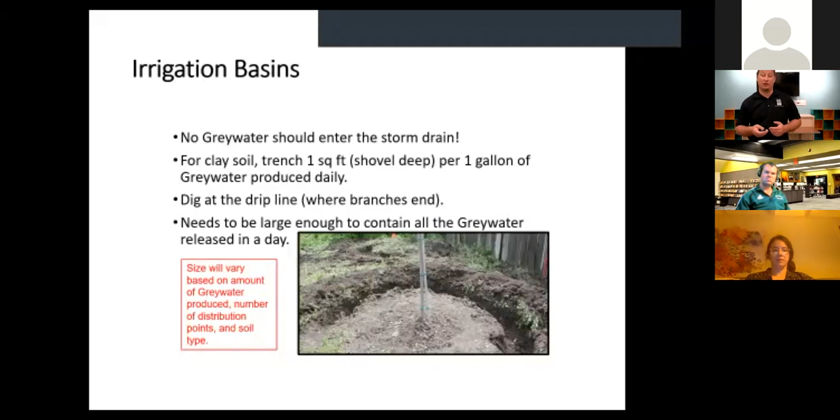You don't want to undersize, you don't want to overbuild your gray water system outdoors to a point where you're not watering the stuff farther down. If all the water is coming out in your first 3 basins and you have 6 basins, then there's 3 basins that aren't getting any water. So you really need to know that.

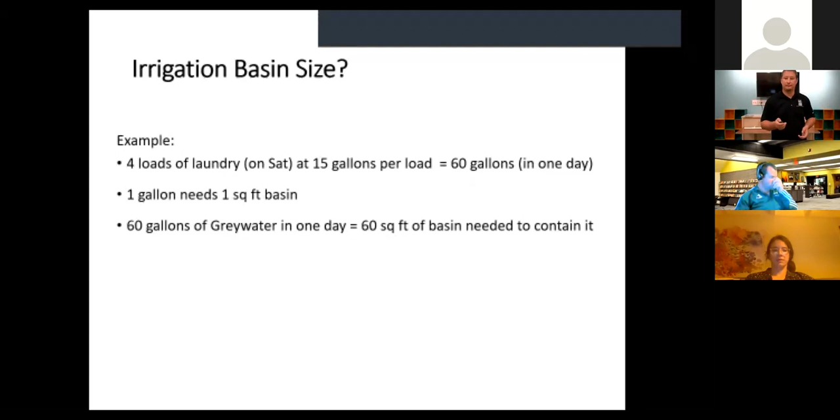especially, throw my wife under the bus here, but she is one of those culprits that I would definitely need this for. Man, she sheds like crazy.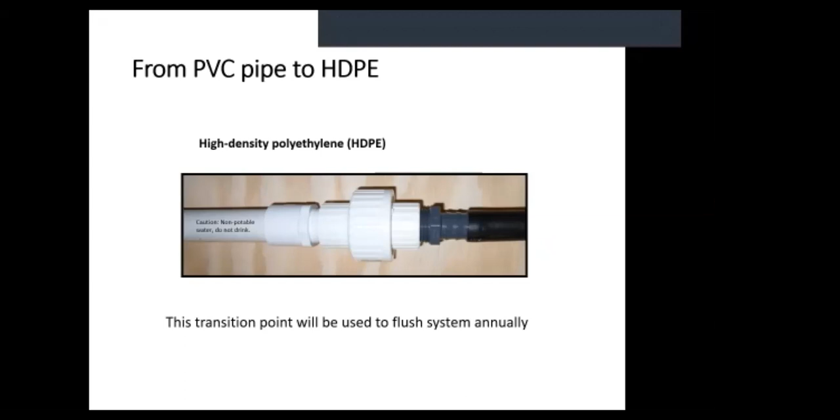So you definitely want to make sure that you have a way to flush your system so that it doesn't clog up with hair and also lint. So that's what this guy is. I think the next slide shows the actual connection pieces that you'll need for the hose to go onto your system. So bottom left and bottom right pictures, those are the pieces that you would actually need to connect your hose basically to that outdoor portion of your irrigation system.

Pretty easy pieces to get just in the irrigation area. If anybody needs a list of what to buy or parts, you can get my email address from Ashley. Just type it in the chat and she can give you my email address, and I can come up with a list of parts that you will need, tees and those types of things, including all the connection pieces to connect your outdoor portion.

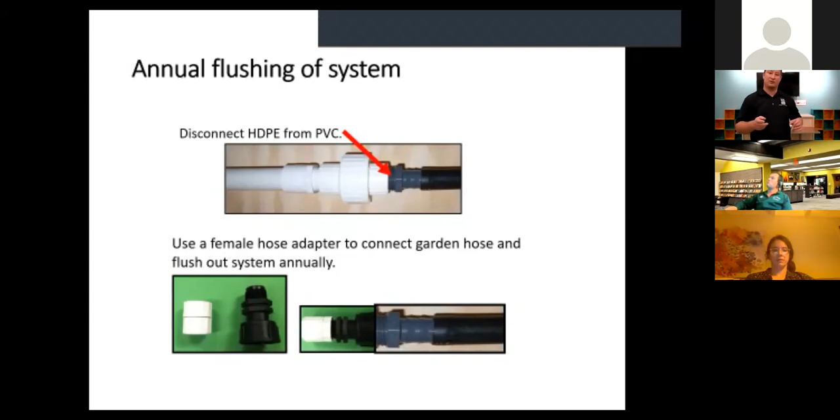So this guy right here, this is exactly what we're talking about for your flushing system. So a lot of times people are going to put this vertical.

Now it's going to make it a little bit easier for them to break those two connections apart, because if it's this way, you're going to have a little bit of wiggle room to unscrew, kind of move it off to the side, because it's up and down. If it's laying on the ground, you're going to have a little bit harder time.

So this tubing I've been talking about, a lot of people use PVC. I don't recommend using PVC. I recommend using this stuff right here. I'm going to actually plug a guy named Chris Reamer. Chris Reamer is very, very knowledgeable on Greywater systems. That's what he does on big scale stuff. And he actually uses this. This is how I found out about this stuff.

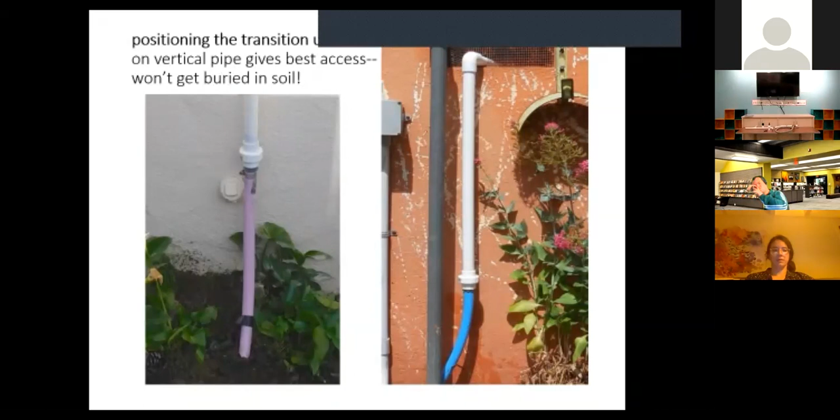Oh, thank you, man. Appreciate it. Sorry about that, guys. That black tubing had some glue, I guess the tape glue all over it. It got all over me. So yes. All right. So sorry about that.

Now also keep in mind, you do need to deliver this 2 inches below the surface, which is what those irrigation valve boxes basically do. It allows you to deliver it 2 inches below ground. You also need to have a nice thick mulch basin to help spread out that water. But plant selection, very key.

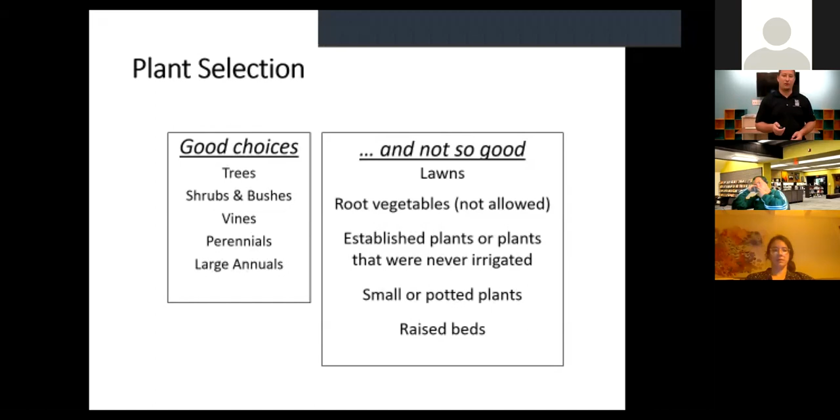Kind of already went over that stuff. Tomatoes, okay. Chard's okay. Potatoes, onions, strawberries, no. Artichokes, yes, because they're above-ground fruiting types of vegetables. Strawberries is kind of weird that they say no on strawberries, but that's probably because a lot of them lay on the soil, and if the soil is getting saturated, it can transfer over. So I'd probably stay away from that.

Like I said, fruit trees, excellent for fruit trees. Plus it's easy to build a basin around them. And then setback requirements. This is actually important to know, because you can get yourself into a little bit of trouble if you're not following these setback requirements.

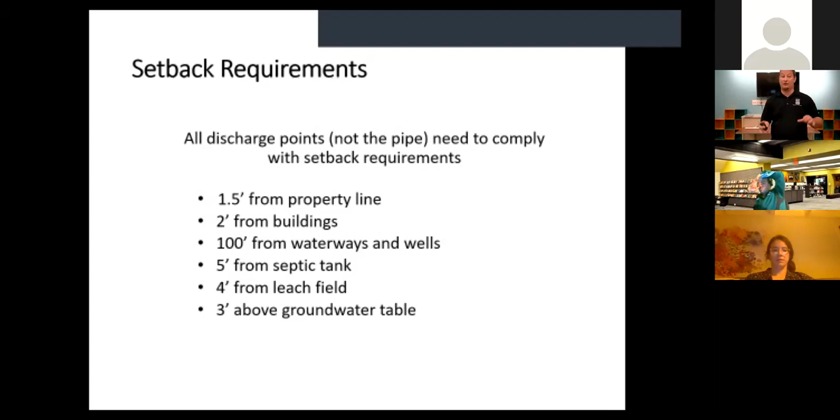So 1.5 feet away from your property line, that way it's not leaving your property and flooding your neighbor. 2 feet from your building, 100 feet from any type of waterway or well, 5 feet away from your septic tank, 4 feet away from your leaching field, and 3 feet above a groundwater table. So you don't want those germs and everything getting into the groundwater table.

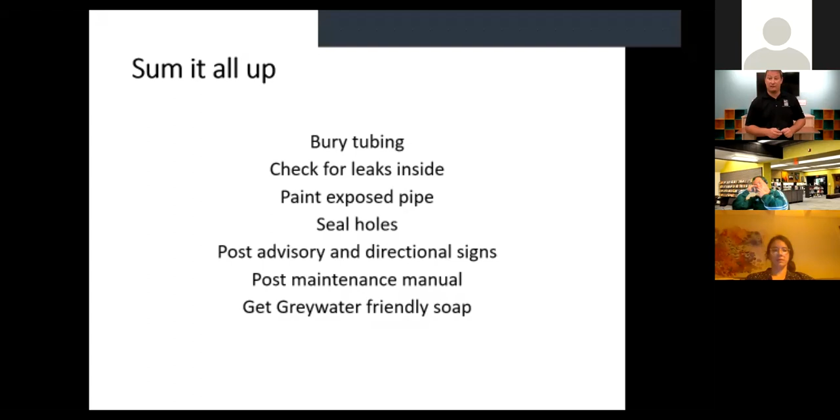I understand that this is a pretty rough crash course in a Greywater system. So if you do have any looming questions after tonight, you're more than welcome to ask questions at the end of this. But if you have any questions that didn't get answered, or if you even need help building it, I'm more than willing to come out to your house and answer questions or make recommendations or any of that type of stuff. So, like I said, tonight's really meant to just get you familiar with the idea of Greywater. But if you need future help with it, I am willing to help you in the future as well.

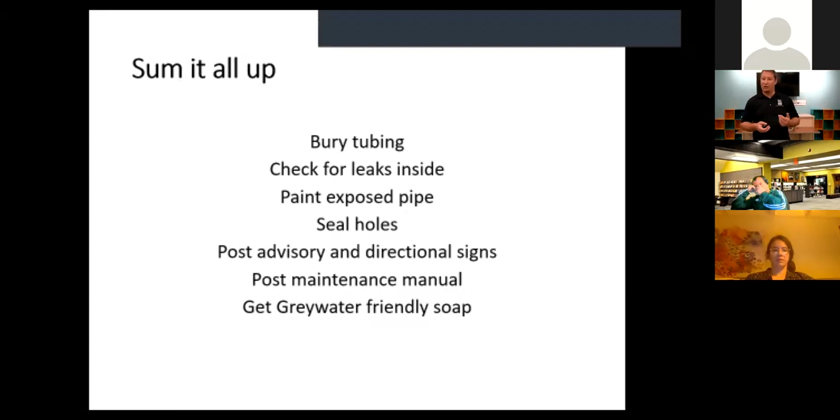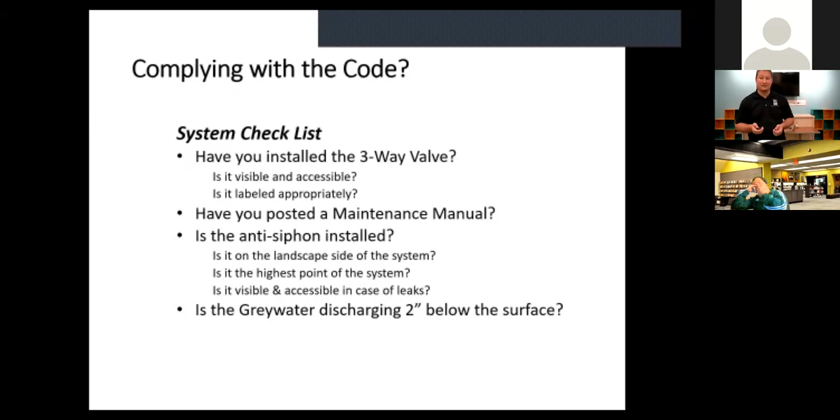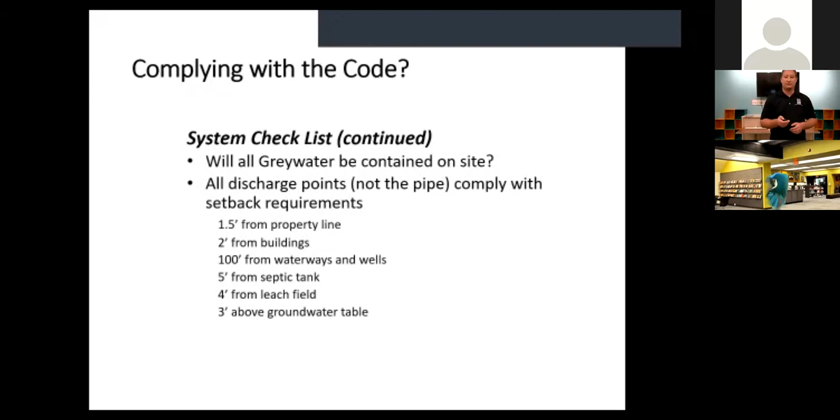And then I do kind of want to just lay out how it works, because I realize I didn't do that for the outdoor basin section. So I'm going to do that really quick. So you have to stop sharing your screen. Okay. Yeah. Stop sharing. All right, perfect.

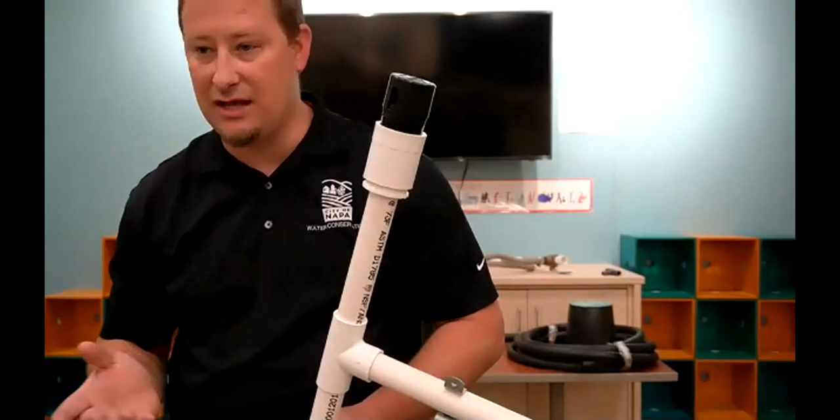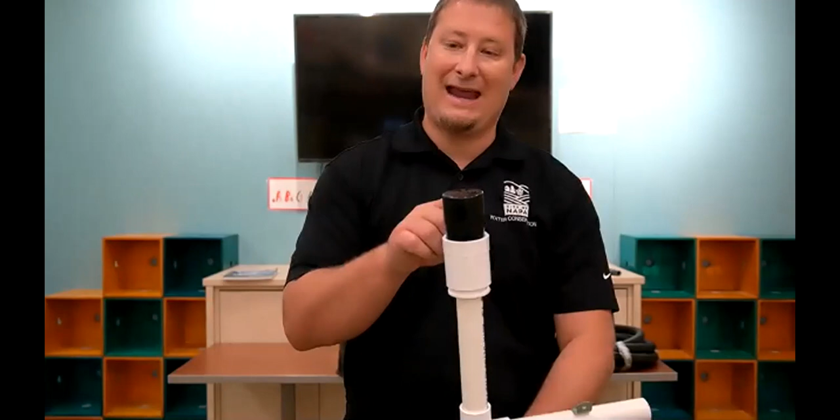You just want to make sure it's the highest point to your system, above your wash machine, obviously. But no, there is not a height requirement for the anti-siphon, just as long as it's at the highest point so that water can't back up and basically flow out. Because if it's lower than your wash machine, the water has a pretty good chance of coming out of the anti-siphon. So you want to make sure it's up above the highest point so that it breaks the vacuum so that water can't basically come out.

Next question is from Carol. Do you know the name of that residential ozone system that you were talking about? Oh man, I don't. I've worked for Napa for almost 6 years, and unfortunately I can't contact my mentor because he passed away. So yeah, I would just Google it.

Unfortunately. That's a perfectly fine answer. Sorry. Believe me, I would rather have my mentor on the planet than be able to call him. Yes. It was a tough pill to swallow. I lost both my mentors in 6 months.

Yeah, hold on one second, Josh. Your video is stuck, so let me. I know it is. I got a funny look on my face. That's always when it pauses. We still have audio, which is great. If you want to get rid of your face, you can go ahead and share your screen and go to the questions. I'm not worried about it. I can look stupid. Okay, well, let's keep on going. We only have a couple more questions.

So next question is from Carmen. Can you use baking soda in a greywater system? I don't see why you couldn't. I mean, if people are using hydrogen peroxide, then people use baking soda to brush their teeth and to clean. So I would imagine you probably could. I've never had that question before, but I don't see why you couldn't, to be honest.